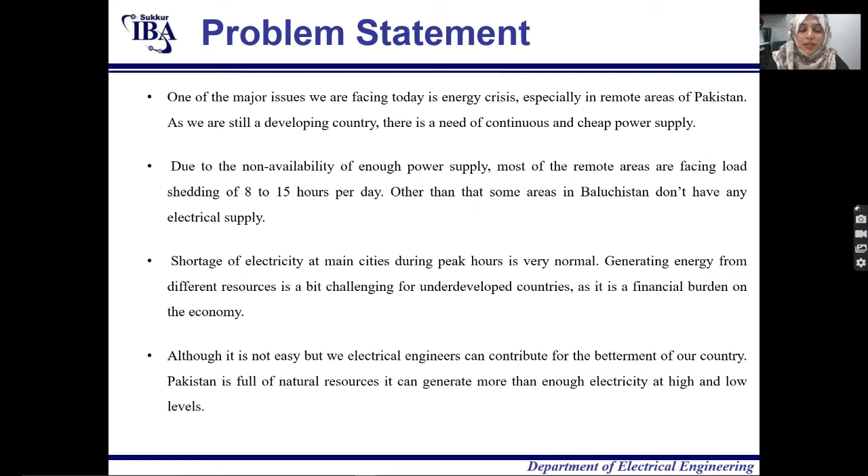It is not easy for engineers to contribute to the betterment of a country, because Pakistan is full of challenges. It is not easy, but we engineers can contribute for the betterment of our country.

What was our motivation? The basic motivation was the mountainous areas in Pakistan. They are full of natural resources, but sadly we are not utilizing those resources at all, because most of the natural fresh water flows from waterfalls, especially in summer when the snow melts, and the water is just flowing and wasted.

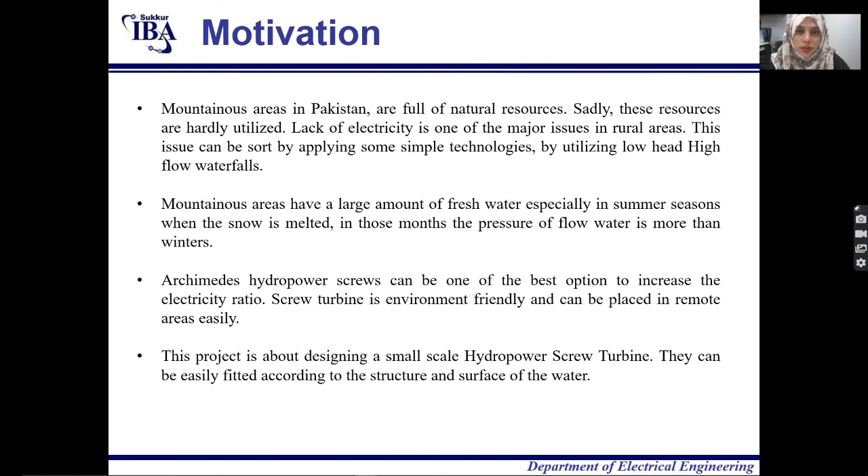If we want, we can utilize that water to generate power, enough power to produce for a village, or we can say for a city.

Then we have gone through many papers while doing this project. We have studied around 20 to 25 papers, but here we have mentioned some of the major ones. The first one was about blades.

The first paper we selected was because of the ratio of blades. In this paper they selected 2 blades, but we increased our number of blades to 6, because as we increase the number of blades, the efficiency of the turbine will also increase.

The second thing, we designed a gearbox to increase the speed of our overall turbine, as we were not getting as much RPM as we needed. So we designed a gearbox to increase the speed of the turbine.

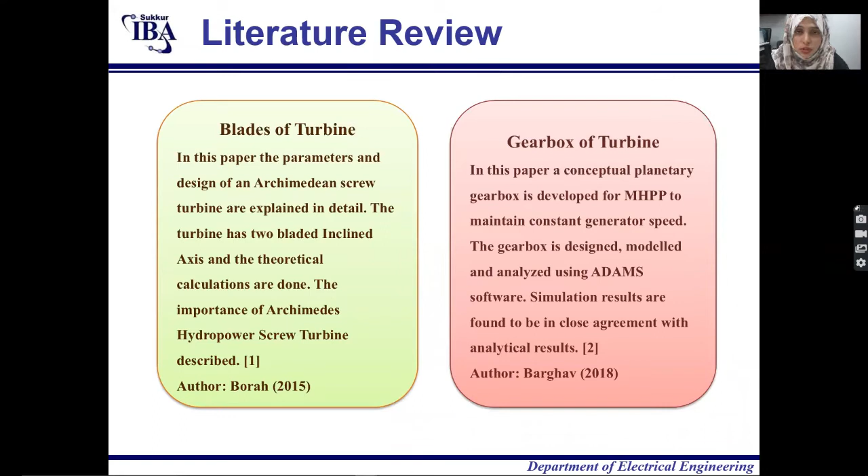The third paper was based on the angle of the turbine, and in this paper they selected the angle from 20 to 30 degrees. We also designed our turbine on the same angle, and we can increase it from 20 to 40 degrees.

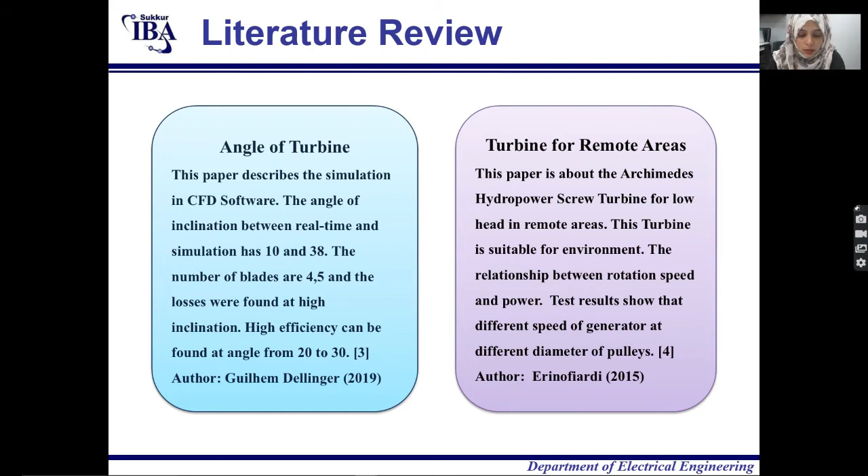Another paper was based on remote areas, how remote areas are affected, how much they need electricity, and how they are ignored by the government and other authorities, despite being full of resources. If the government wants, we can utilize the natural resources and facilitate them with enough facilities.

The other thing was RPM in the turbine. Our turbine is producing 175 RPM, revolutions per minute.

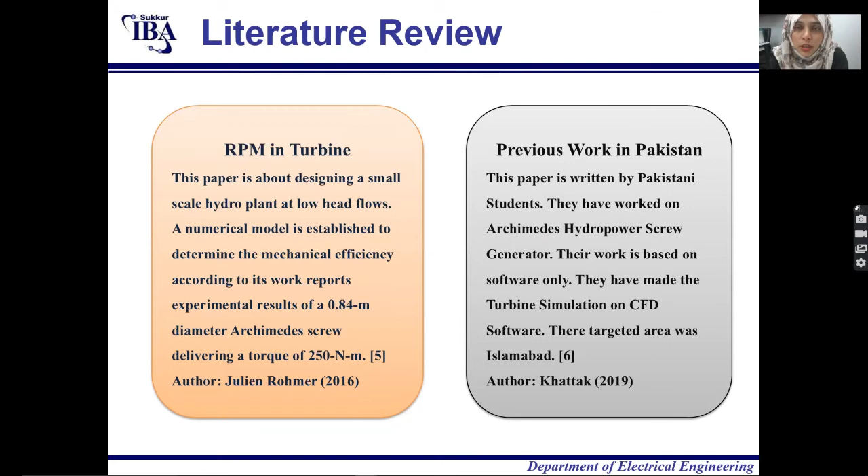The last paper we selected was written by Pakistani students, who worked on this Archimedes screw turbine using a software called CFD. They designed the complete model in the software and analyzed all the values, mass flow rates, and other things. We did the same, but we also manufactured the turbine in real time.

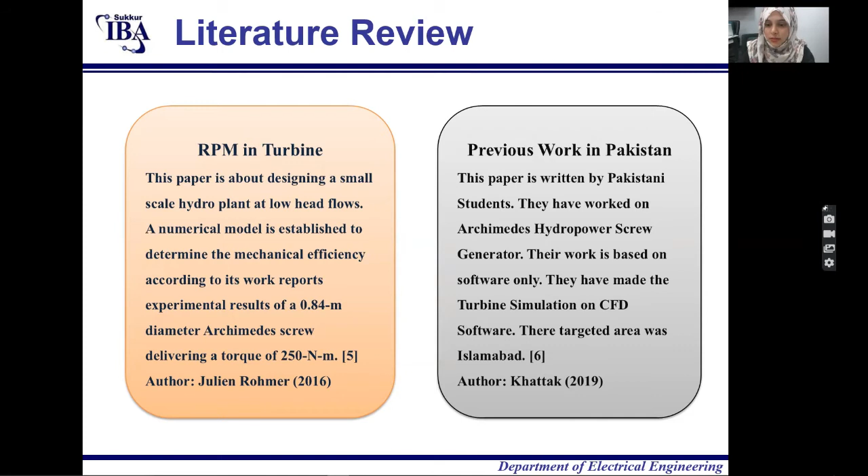Aims and objectives. Our basic aim was to design a prototype of the turbine, up to 1 meter long, which we can implement in real time in a small river or flowing water, and produce up to 500 watt or 1 kilowatt.

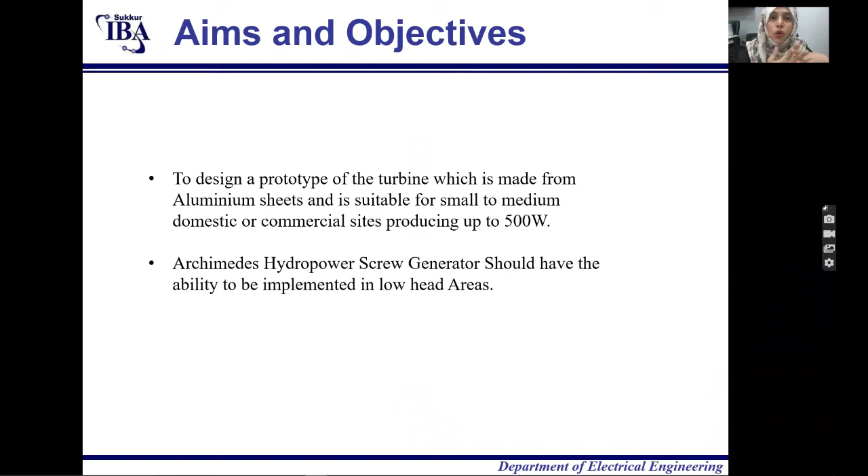This is our methodology. In the first step we did the simulation part, and we designed each and every part of the turbine in SolidWorks software, and for the gearbox designing we used FreeCAD software, and then we used ANSYS Fluent software. This software is just for confirmation of mass flow rate, velocity, force, volume, etc. So we used that software, and we found all the values in runtime through simulation.

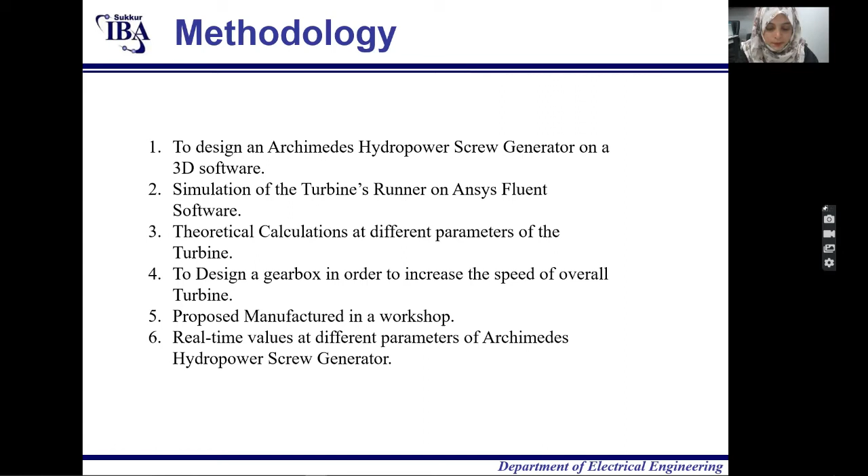Then we finally manufactured our proposed model in a workshop. At the last we calculated all the theoretical values as we did before, and then we measured the real-time values. Then we calculated some results like area, length, force, volume, mass flow rate, and input RPM of the gears, as we have used spur gearbox.

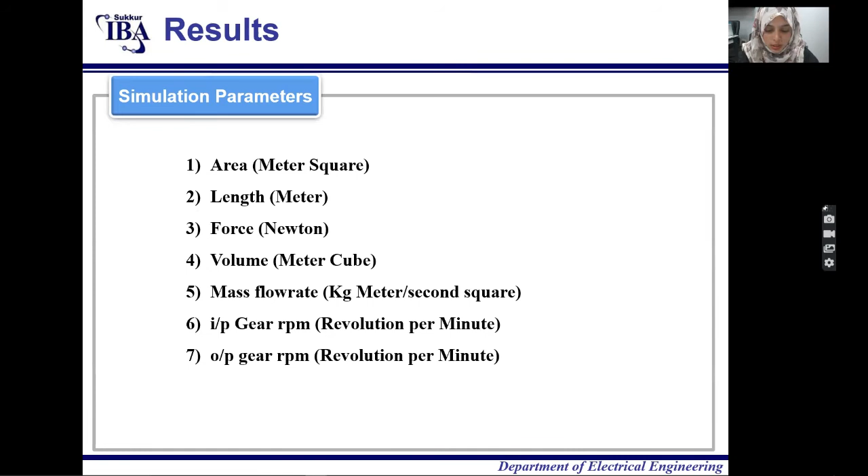It consists of 2 gears, one primary and one secondary gear. So we calculated RPM for each gear, and we also calculated the gear ratio.

Here are some theoretical calculations. We have calculated the gear ratio and the mass flow rate. First of all we assumed the mass flow rate from another research paper, just because we didn't have the mass flow rate in real time before designing the turbine.

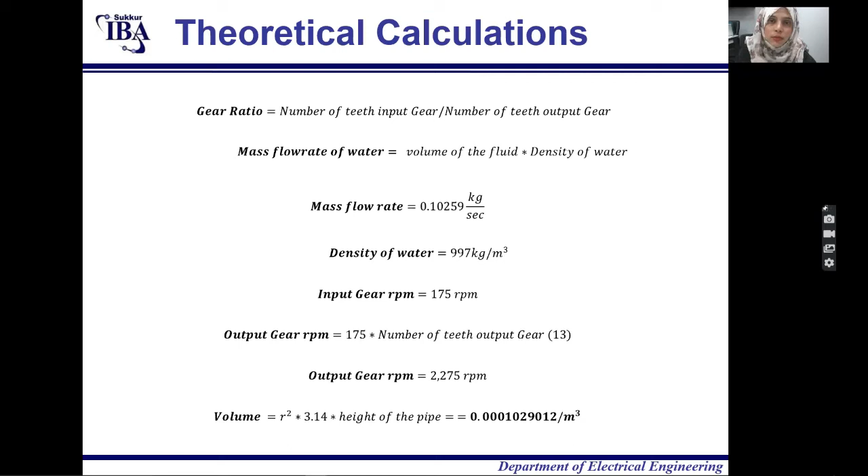Here we have calculated the volume of the water, according to our pipe from which we are providing the mass flow. And here are the results of our theoretical calculations.

As you can see, this is our simulation. This is our gearbox, designed on FreeCAD software. This gearbox has a primary gear and a secondary gear, and the gear ratio is 1:13. We have put our secondary gear very small, and the number of teeth is very low as compared to the primary gear.

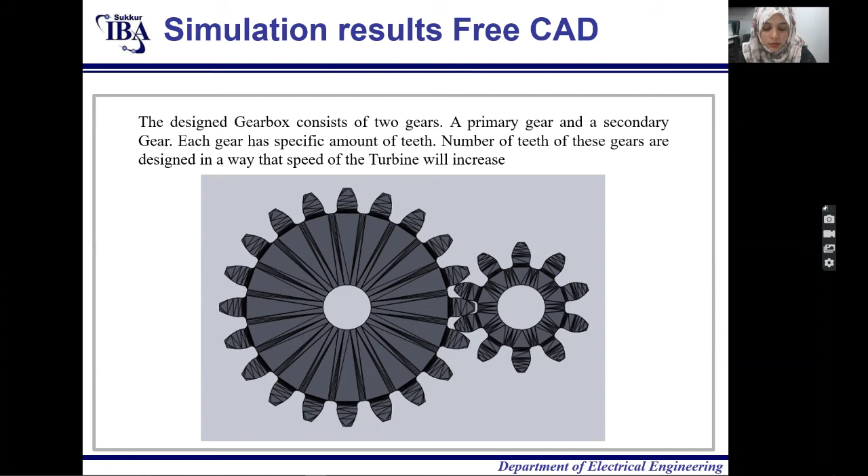This is the simulation of our turbine on ANSYS Fluent software. We choose a runner just because our moving part is a runner, which will be moving. The water will hit the runner, and as it strikes the blades of the runner, the kinetic energy will convert into mechanical form, and then it will produce energy.

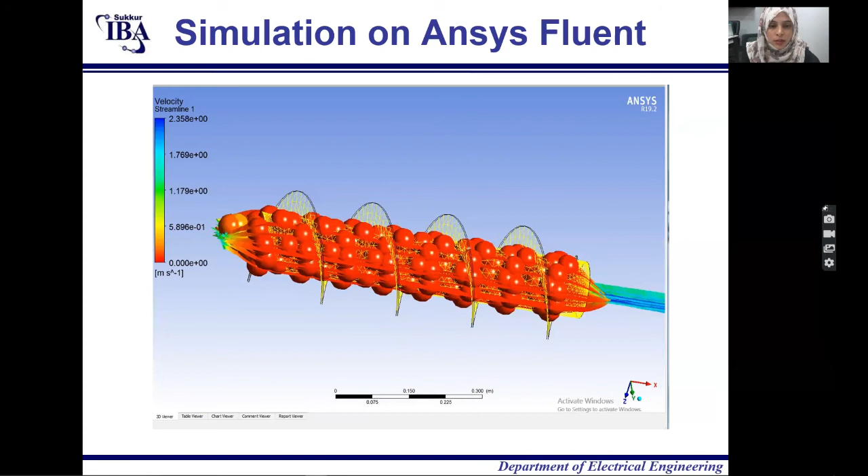Here you can see the red balls. The red balls are showing the flow of water. As the water is moving or flowing down, the velocity of the water will decrease.

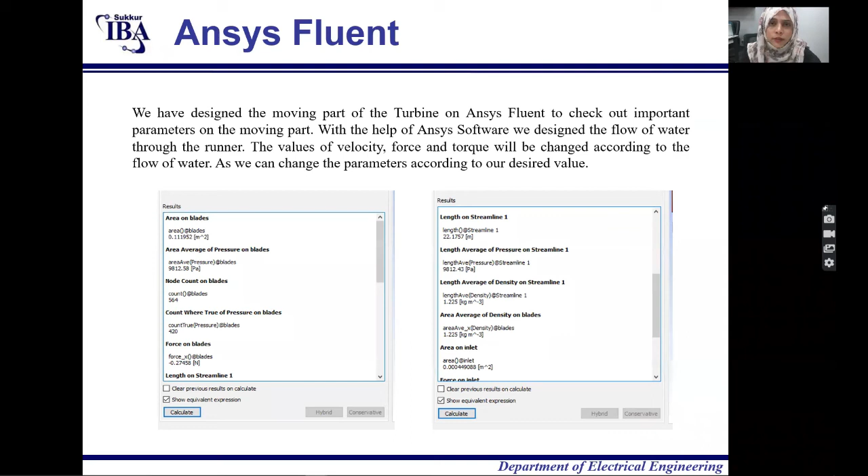Here are some simulation results we have calculated on the ANSYS Fluent software, which consists of area, length, force, mass, mass flow rate, and volume, etc.

For the hardware part of the turbine, my friend and group partner Habibullah Khan worked on it. So this is the hardware of our design. First we designed the runner of that turbine, which is 1 meter long and consists of 6 blades.

At both ends of the runner, a shaft is connected, and it is horizontally placed with the help of two bearings. At the end, a spur gearbox is connected, which will convert the low RPM into high RPM with the ratio of 13. This is the stand of the generator on which we will place the generator.

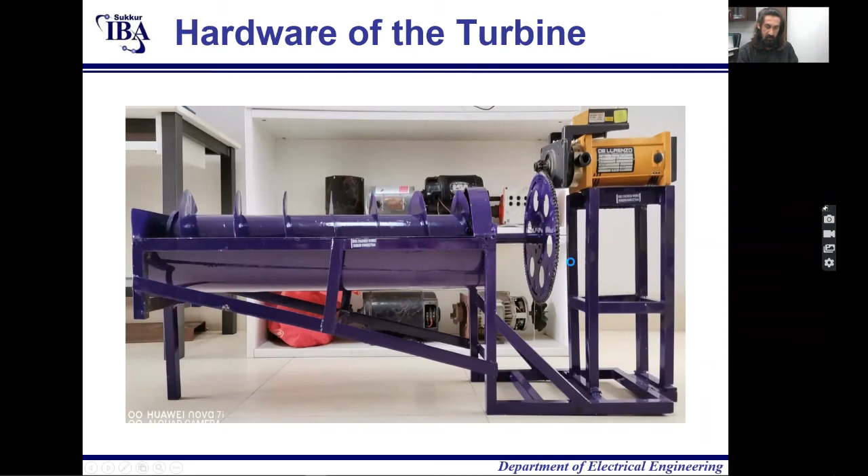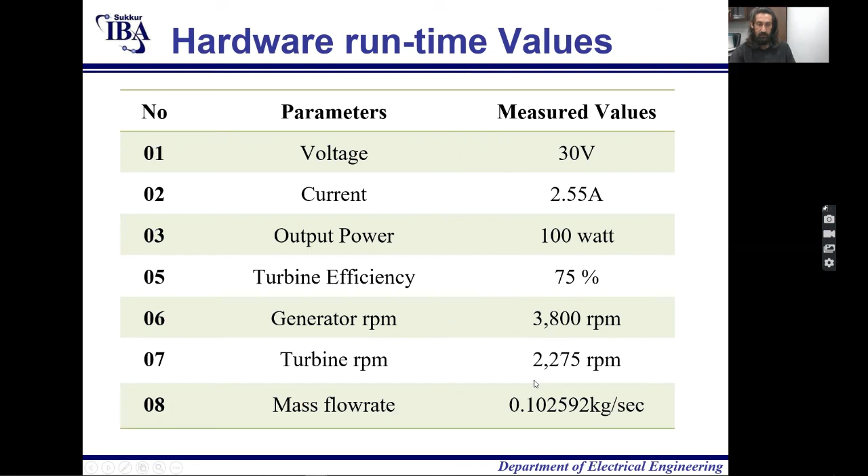Generator RPM which we have selected is 3800, and the RPM of our turbine is 2275, with a mass flow rate of 0.102.

In conclusion, first we wanted to design the whole turbine on software and then implement that design on hardware. So we have successfully done that.

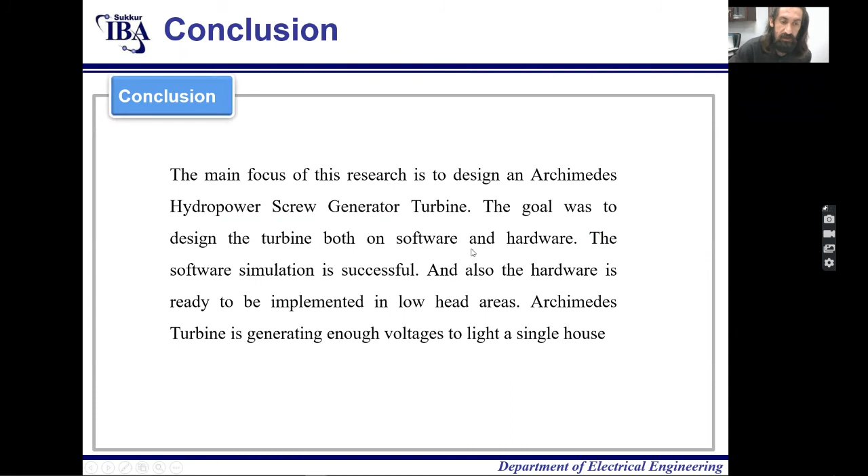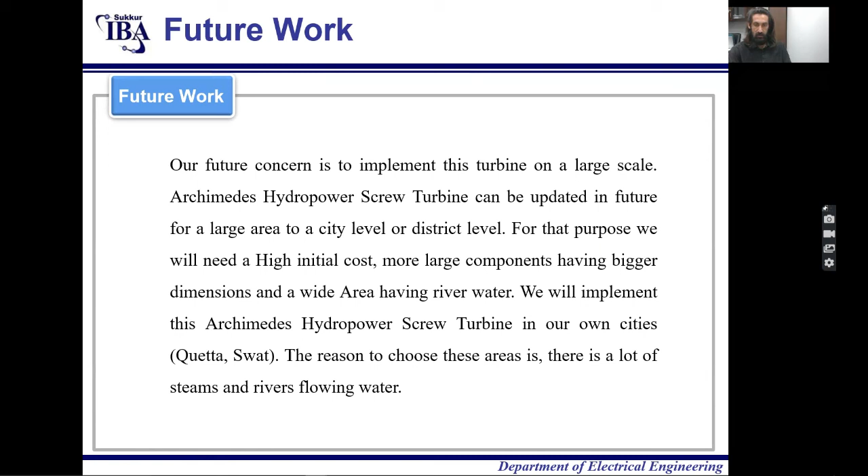The future work will be to design a model for high voltage production of up to 30 kilowatts.